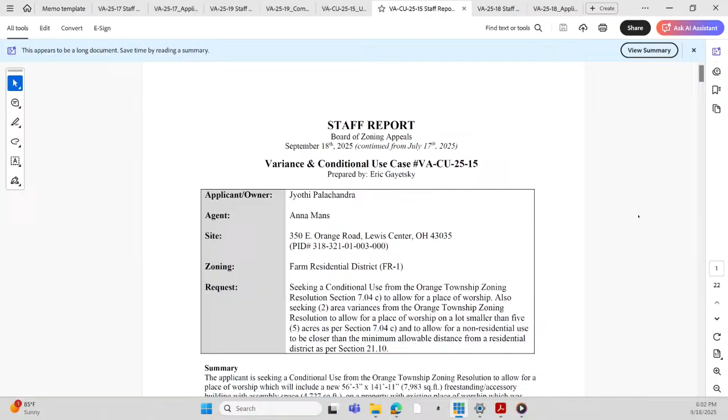This is a variance and conditional use request, as the applicant is seeking a conditional use firstly from the Orange Township zoning resolution to allow for a place of worship, which will include a new 56 foot 3 inch by 141 foot 11 inch freestanding accessory building with assembly space. The assembly space is 4,727 square feet on a property with an existing place of worship, which was previously approved in 2023 under variance case VACU-23-10.

Since the previous BZA hearing on July 17, 2025, the applicant submitted revised plans as shown in this report, and I will add the caveat that revised plans were submitted subsequent to the report, which we had received just within the last couple days, and we did pass that along to the BZA, but I will try to distinguish the plans shown and reviewed in this report with the most recent plans from 2 days ago.

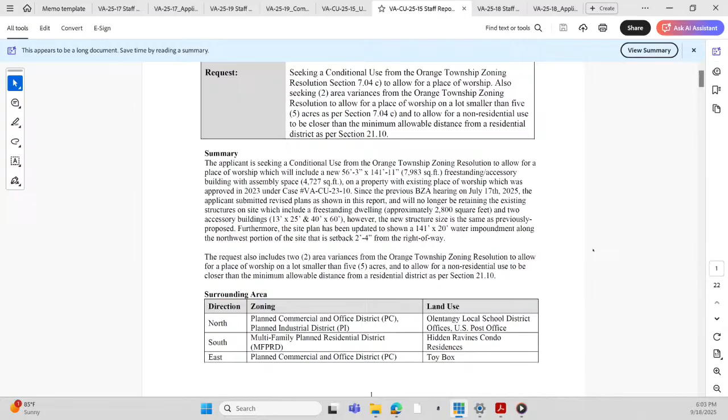All right, so there are, again, changes from the previous plans that you had reviewed in July. Essentially the structures that are existing on the property, which contain what used to be a residence and then 2 accessory buildings, are all slated and planned to be removed. So that would leave a new structure, which is that 56 by 141 structure, as well as parking lot modifications and new drive aisles, in addition to a new detention pond that is shown on the site plan.

So what that means is the request includes 2 variances from the Orange Township zoning resolution to allow for a place of worship on a lot smaller than 5 acres and to allow for a non-residential use to be closer than the minimum allowed distance from a residential district per section 21.10.

All right, the surrounding area, that includes zoning district. So to the north is planned commercial and office district. The land use over there is the Olentangy Local School District offices and a U.S. Post Office. To the south, the zoning district includes multifamily planned residential district, and the land use is the Hidden Ravines condo residences. To the east, the zoning is planned commercial and office district, and the land use is toy box. Finally, to the west, multifamily planned residential district, and planned commercial office district. That's also land uses of Hidden Ravines condo and Healthy Pets veterinarian office.

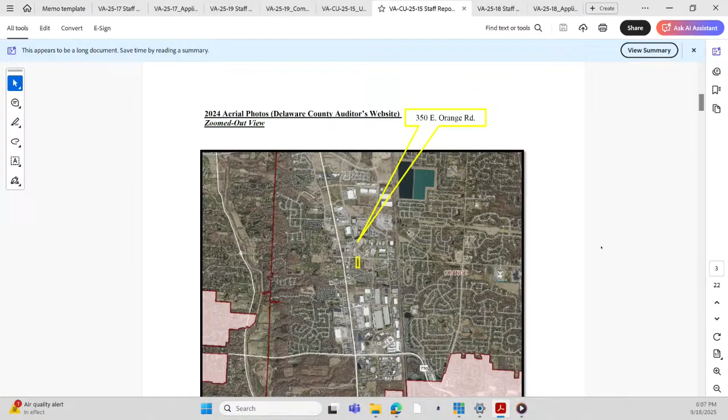Just a couple of photos from the aerial point of view. You can see, off Orange Road and just east of US 23, the location here. This is a 2024 aerial view showing the existing structures and parking area on site.

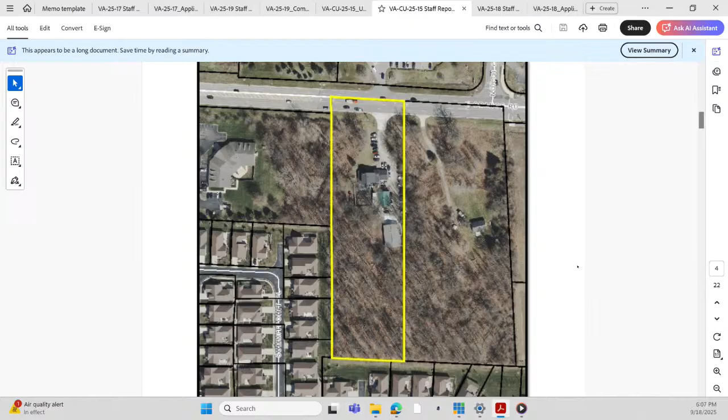So the staff review, at the time that report was released last week, staff had found 5 total area variances in addition to the conditional use. You'll see them listed 1 through 5. Numbers 1 through 2 were requested by the applicant, and numbers 3 to 5 were identified by staff.

This is an area variance and conditional use from Section 7.04C of the Orange Township zoning resolution: churches or other places of worship, provided they occupy a lot not less than 5 acres plus 1 acre for each 100 permanent seats over 300 in the main assembly area. The proposed use for a place of worship requires a conditional use granted by the Board of Zoning Appeals, as outlined in Section 7 of the Orange Township zoning resolution.

As noted above, the applicant was previously granted an area variance from Section 7.04C to allow for a place of worship on a lot smaller than 5 acres under case number VACU 23-10, approved May 18, 2023. The proposed site has a total acreage of 3.35 acres.

In the application, the applicant notes an occupancy of about 400 people is planned, while the current facility accommodates 150 people. No additional acreage is required for the number of seats, but the property does not meet the minimum acreage requirement of 5 acres and requires an area variance. The parcel of the proposed place of worship is 1.65 acres smaller than the required 5 acres. This is roughly a 33% variance request.

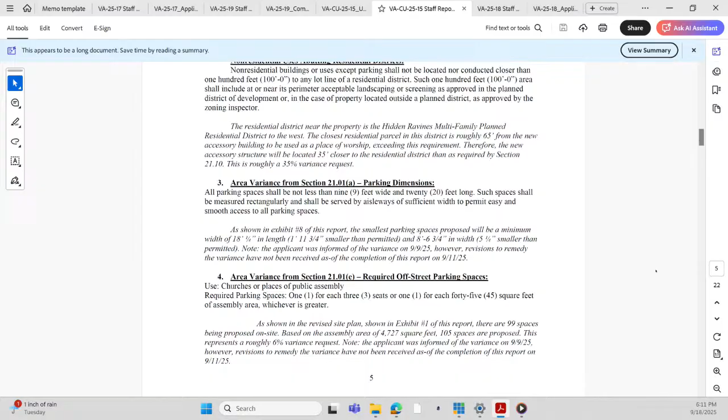For area variance number 4, that's from Section 21.01C, required off-street parking. For a church or place of public assembly, required parking spaces is 1 for each 3 seats or 1 for each 45 square feet of assembly area, whichever is greater. As shown in the revised site plan in Exhibit 1, there are 99 spaces being proposed. What we have seen on the cursory review, the count is, I think, 108—I will have to double check that.

Yes, 108, and the applicant will also be able to take you through that revised site plan.

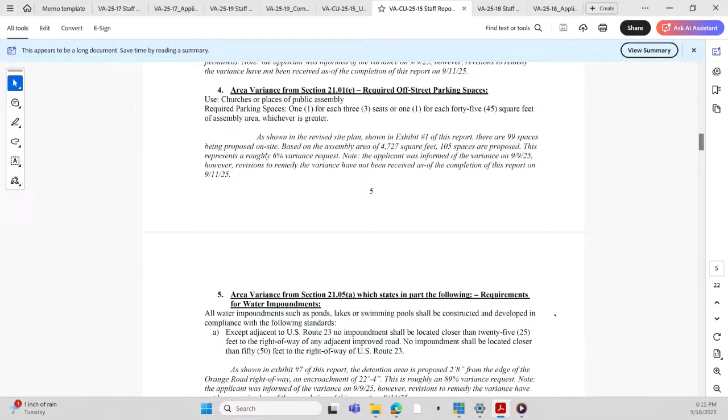We will move right along to the 5th variance that staff had found, which appears to be remedied by the revised plans. Area variance from section 21.05A, which states requirements for water impoundments: ponds, lakes, or swimming pools shall be constructed in compliance with standards. Except adjacent to US 23, no impoundment shall be located closer than 25 feet to the right-of-way of any adjacent improved road.

In the previous version submitted 2 submissions ago, the applicant had shown the proposed pond, the detention area, would be 2 feet 8 inches from the edge of Orange Road right-of-way, an encroachment of 22 feet 4 inches. We had not closely looked at it. However, the applicant's revised plans, the most recent submission, shows 25 feet separation from the edge of the new detention area to the edge of Orange Road.

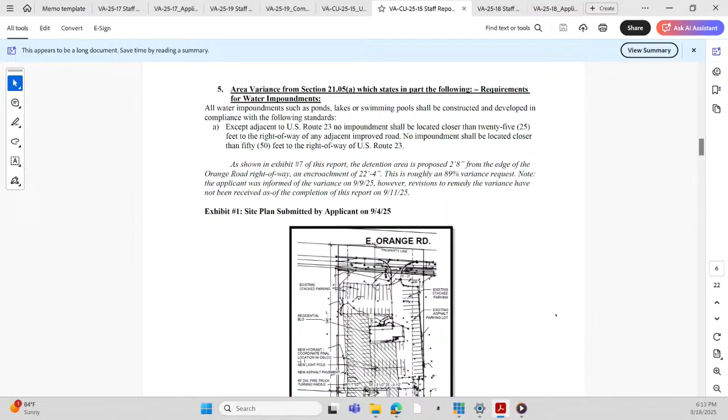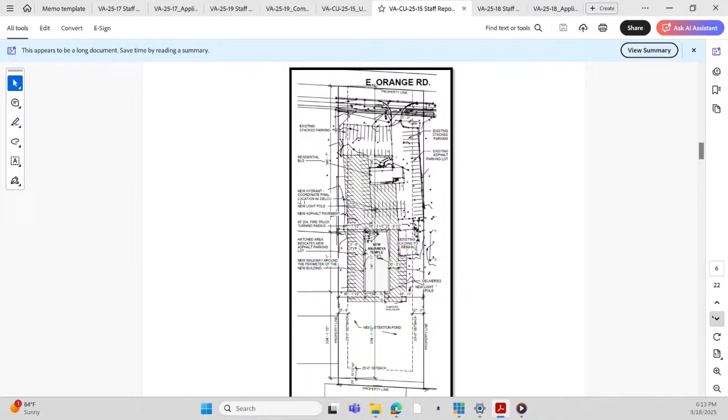We have a couple exhibits as mentioned. Exhibit number 1 is the version 2 submissions ago, as submitted on 9/4/2025. The next exhibit shows the location of the temple on the most current site plan as 65 feet and a half inch away from the western property line, which is a residential district. That variance is still needed and a consideration for you tonight.

This is provided by the applicant. Again, this is not the most recent site plan, but the one we have in the report. The existing layout is to the left, and then the site plan as of 9/11/2025, with some modifications to the parking areas as well.

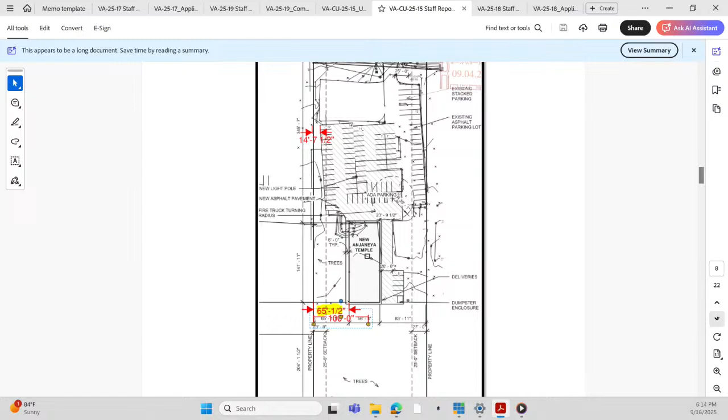And then Exhibit 4, the size of the detention area appears to be about the same, but it has been moved back 25 feet away from the right-of-way. You see that in the top left corner, the northwest corner.

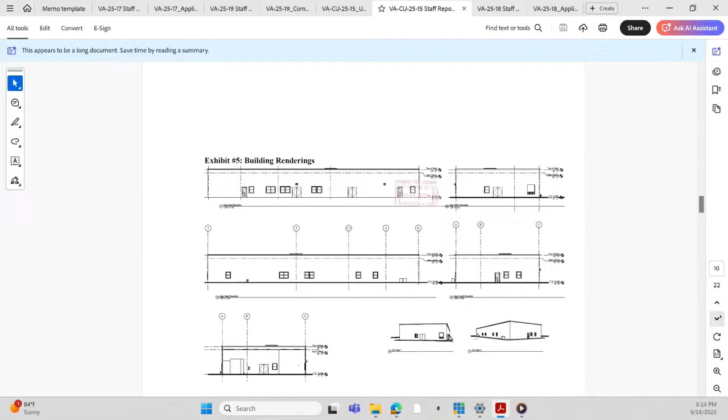All of the building renderings are the same as shown in Exhibit 5. The floor plan remains the same as shown in Exhibit 6. As I pointed out earlier, that's 4,727 square feet of assembly area as shown on the floor plan.

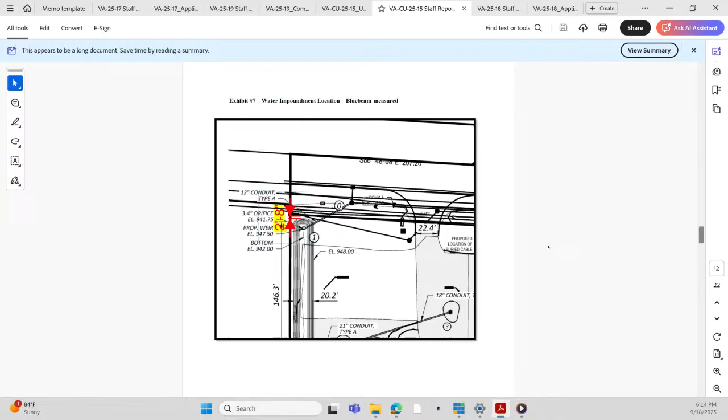Again, this is the earlier measurement from Exhibit 7, but you will see a 25-foot label on the most recent site plan for the water impoundment. We did not have a chance to measure parking spaces for the most recent site plan, but in general they appear to be in conformance with the size requirements.

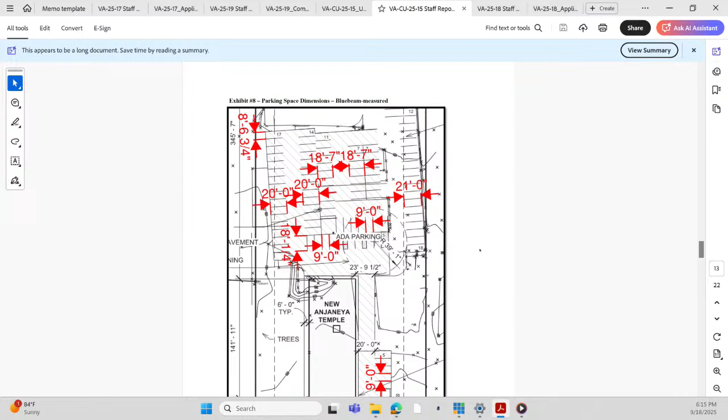So that's from the older site plan. These are the original site photos, which we made a couple updates to. We just noted that all of the buildings as shown on site are planned to be taken down, demolished. So that is a difference from the original proposal.

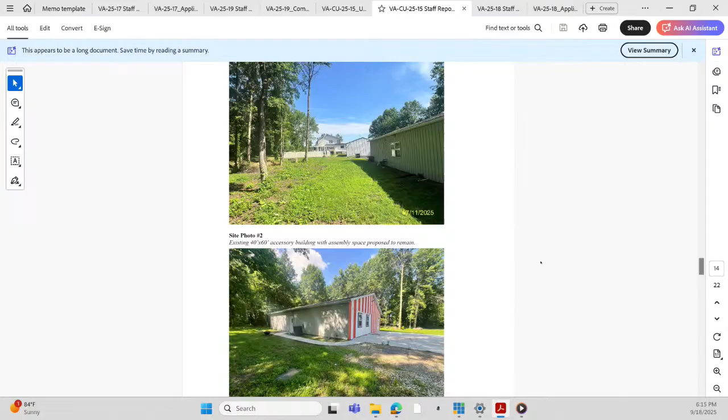The last site photo, number 7, shows the entrance and current parking area, and the retention pond would be planned to be added along the right side tree line for your reference.

For the technical agency review, the Orange Township Fire Department indicated that the site circulation of the new parking area, along with building proximity to fire hydrants, would need to be reviewed and approved. I have not received any letters or correspondence stating that the Fire Department has approved or completed a full review of the plans. My understanding, and the applicant can clarify, is that it will be subject to some additional engineering drawings from the applicant so a full review could be completed, but I will leave that to the applicant to fully clarify. The last section is the board analysis.

This is applicable to case VA-CU-25-15 and criteria for an area variance. We have all 5 variance requests listed out. As stated, it does appear in general that variance number 1 and 2 are the only ones that are needed. So we'll allow the applicant to further elaborate on their most recent submitted plans from, I believe, Tuesday.

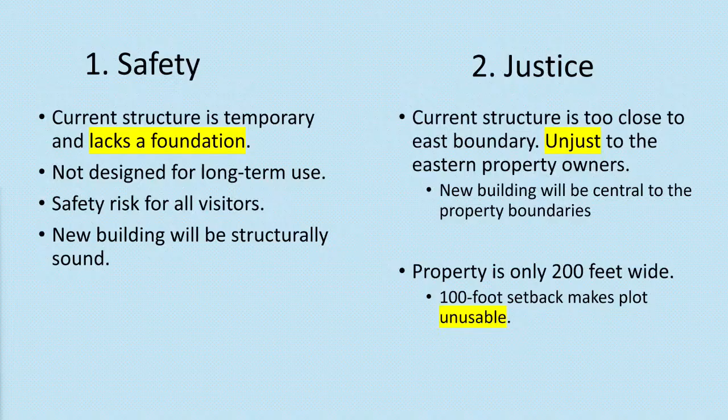I just wanted to introduce myself again. I'm Neil, I'm a volunteer as well, and I am a professional engineer in Ohio. I think I'm leading the building activities for the temple. Today, the drawings that we're going to discuss, we have an architect and we have hired an engineer who has developed these plans that we're going to talk about.

We really heard our neighbors, and we modified our plans to meet all of their concerns from last time. We hired engineers, BG Engineering, and thoroughly addressed the stormwater issue. That was one of the main points. While we did not need to do that for the zoning permit, we could have done that afterwards, we went ahead and hired and spent money to get these drawings.

On the underground, there is an underground collection system, as you can see, that drains into a detention basin northwest of the property, and the detention pond connects to the East Orange Road storm sewer, the county storm sewer. The engineers have coordinated this plan with the county for the storm sewer calculation.

On the stormwater management, I know there were concerns in general. If you look at the site, it's sitting low below Orange Road right now and drains to the south. But with these proposed changes we're recommending, the engineer went in and did some proposed grading, and was able to size the storm infrastructure that basically drains back to Orange Road.

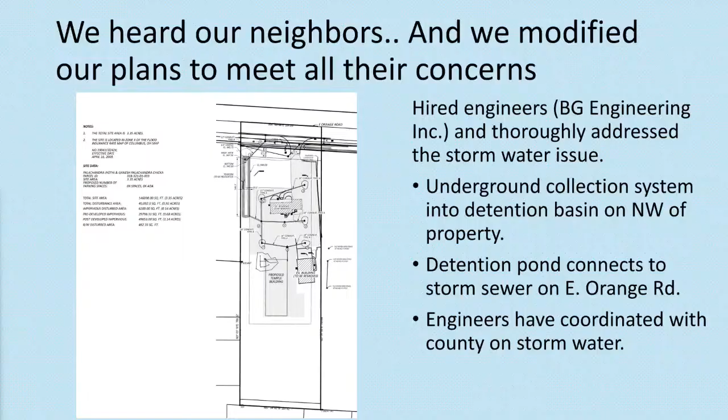We're also preserving a lot of green space on the site, especially on the west side of the new building. Previously we used to have parking in that area, but that parking has since been removed, and we're preserving all the trees and the natural green space over there. So there's natural evapotranspiration and infiltration that would occur on the site, which would help with the overall stormwater management goals.

Karthik mentioned this, but the engineer basically went through all the calculations and coordinated with the county. We've talked about our options of whether to have detention on the south side of the lot or the north side of the lot. In the best interest of all the comments we've received previously, and what's best for us, we feel this plan is the most optimal for us to move forward with the stormwater management of the site.

The engineers also certified that there's no net increase in stormwater management flows from the site, and I would say there's no adverse impact with respect to stormwater to any of the neighbors as we stand right now.

Given that today the entire property, the majority of it, drains south towards the neighbors, with this plan all the impervious area draining is being graded and built towards the north. It is far better than the current situation for any stormwater.

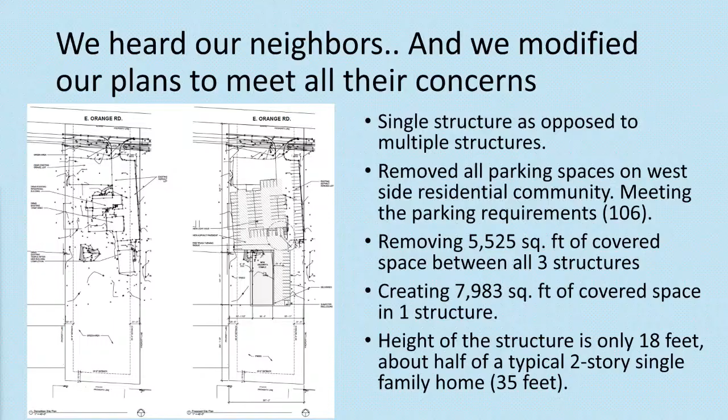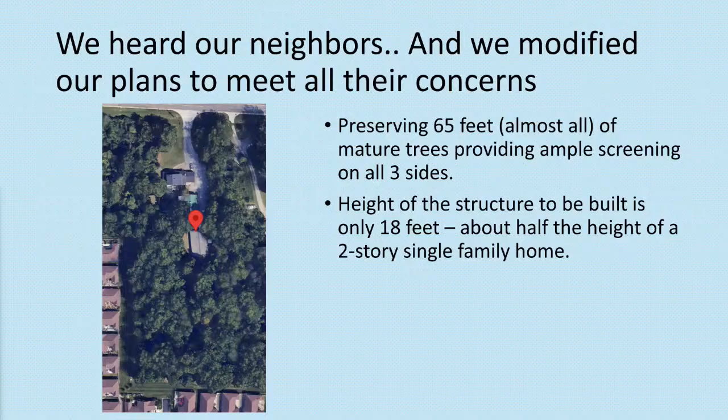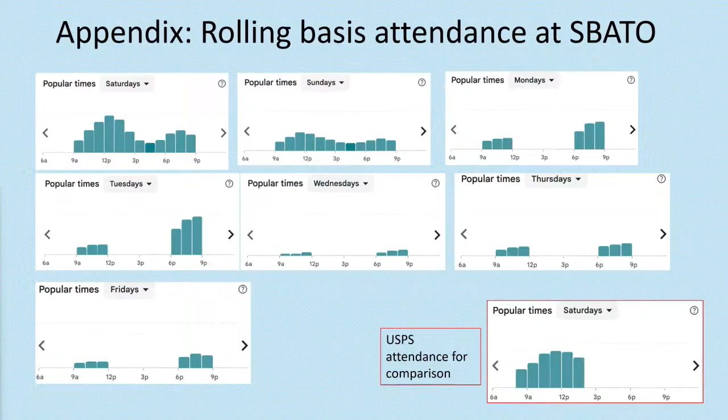Any questions? Anything to add? In conclusion, we believe the new structure ensures safety for ourselves and our devotees. It provides justice to both our neighbors, meets all the community needs, and addresses all the previously provided feedback.

We are requesting only 2 variances: continuance of the variance from the previous time for minimum acreage requirement, and a new variance for 100-foot setback reduced to 65 feet on the west side and 83 feet on the east side.

Just to note, the updated plans for the other 3 variances mentioned by the staff were provided on 9/11 at 7:30 p.m., about a couple of hours after. We took a couple of days to respond to the comments received on 9/9. As mentioned, we are all volunteers, so we took a couple of hours more than required to get back with the updated plans. Otherwise, with the new plans, we believe variances 3 to 5 would not be on this report.

Okay, thank you. Question? Anything else to add?

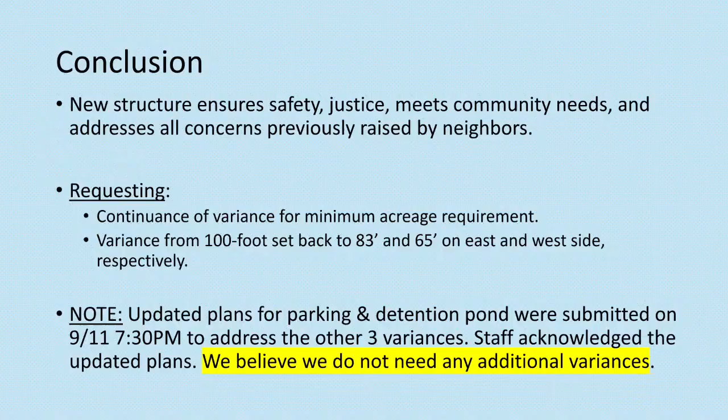Any questions for us? I have a question on parking. Is that now? Sure. Just on the site plan, parking particularly. I'm looking at your plan, I don't know which one, I'm looking at exhibit number 2. I don't know if you can pull that up or not, so I'm just trying to make sure I fully understand the counts.

So that area to the north, that is your current gravel parking lot? Yes, that can be used as overflow parking if needed. That gravel we are not utilizing yet in this plan. So we have more space for parking if needed, but we don't intend to pave it because we want to retain as much pervious surface. We don't want to make it impervious also.

Okay, so I appreciate that for the storm drainage standpoint, that you're keeping it pervious. But you're not including those within your calculations? That's correct. We're not including the 106 or 107 parking spaces, we are not including the gravel. Okay, so it can provide additional parking.

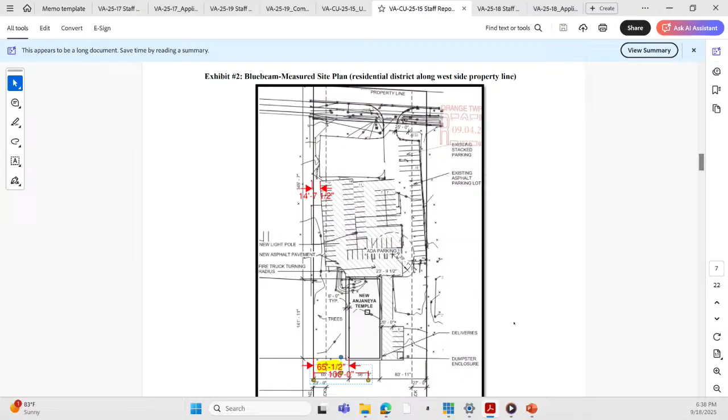I also see that you've included a 39.1 turning radius for the Orange Township Fire Department in there. Has the plan been reviewed by your engineer or designer on that? So we had the civil engineer involved. The missing parts for the fire department are basically the location of the fire hydrant, which will be located later when we get this approval and move forward with the project. In my opinion, it shouldn't hopefully hinder the zoning approval. No, the fire hydrant probably wouldn't in that regard.

This is more just general on the viability of the plan itself, the strategy on the parking is what I'm trying to get to, even from an overall perspective. I see one light pole there in the center, but the main thing was just understanding that you've accounted for that. I'm doing my counts myself, and I'm coming up with 98 spaces.

So you have double parking up there in the top, what's going on? One thing, from the plan you're looking at, the change that came for us kind of late was the location of the storm basin. It was too close to those northeast/northwest parking spaces, so we shifted and realigned everything. There was a slight difference where, on the east side of the building, we added more parking spaces going all the way along the building, and just kind of rotated it so it wasn't encroaching onto the setbacks.